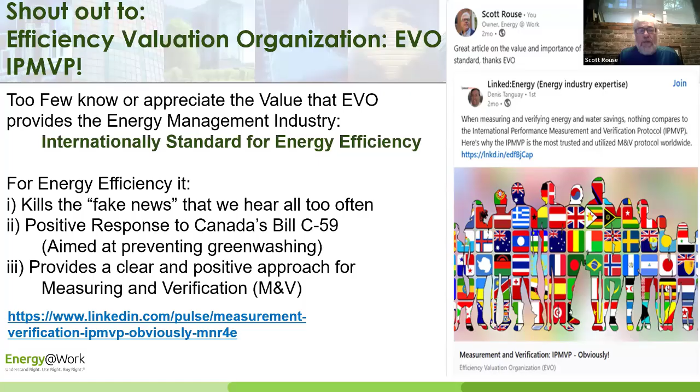So I'm going to go through the welcome objectives and some introductions very quickly. Our learning objectives - we've always wanted to bring content to these webinars.

We don't want talking heads. We want heads who talk and be able to share real value in what we've done.

I'm going to lead off with a case study that we've done with 28 commercial offices. This was for a 4-year project. Then we're going to have Stephen talking about RETScreen and really releasing a good portion of its capabilities. And then Amir is going to jump in with some specific projects.

We don't want to talk about generalities. We want to be very specific. And then we'll end up with a call to action, what you can do, and hopefully give you enough confidence and information that you can take away and actually take advantage of what is available.

So let me start out with KnowEnergy. KnowEnergy has been around for 4 decades, doing education, webinars, workshops. More importantly, analytics. If you've got a challenge, Stephen is first up to help work through that challenge, understand the data. He's famous for saying, let the data speak to you. And I've taken that to heart, because a lot of times people will throw numbers at you without actually stepping back and listening and trying to understand what that data is really telling.

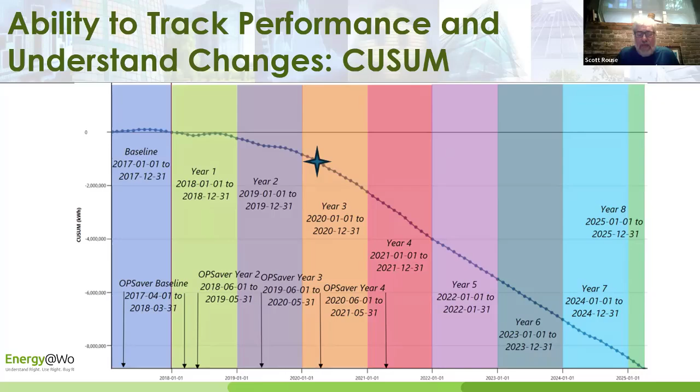What was exciting about this and the other projects is the sustainability of energy efficiency. A lot of people think it goes away, but with that energy management plan and direction, we've been able to demonstrate that we've sustained the savings. Again, we've used RETScreen to help make that possible.

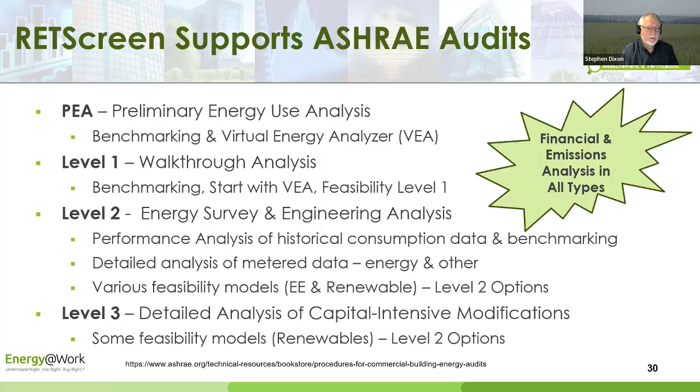So, pre-feasibility. Here's where we can start with the virtual energy analyzer. We can scale the building to our actual building, and I'll give you a view of the analyzer and the scaling tool in a minute. We can do benchmarking. We can set base case, proposed case, and set targets for reduction and what that would save.

We can select within the archetypes, which are in the virtual energy analyzer, and select or deselect certain projects to include. So you're given a sort of archetypical building, but you can tailor it to your own situation to some extent. What that allows you to do is arrive at a pre-feasibility assessment of what opportunities might exist. You can do a financial analysis and emission analysis here.

So the archetypes are really full-blown models in RETScreen. The word archetype really means a very typical thing. The archetype has benchmarking information in it, but it also has detailed information about the building. It can be by measure, or by whole facility, for many different facility types. I can't remember how many facility types exist in the archetypes, but it's in the hundreds for sure.

And each one has a description of the base case and the proposed case—so what is this archetype designed to represent?

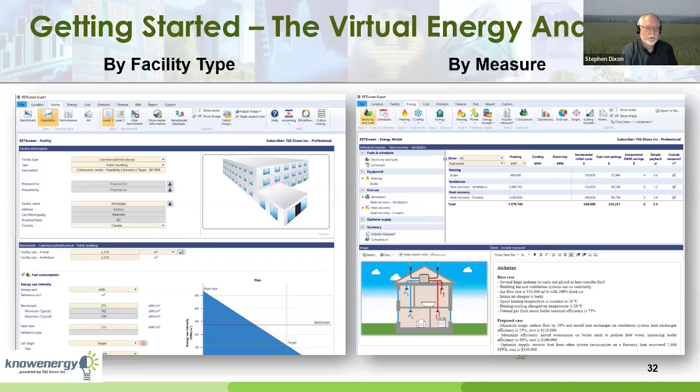Now, the scaling function—this is where you can take a predefined building, maybe like the one on the left here, and scale it to your own building. So maybe the archetype was 4,500 square meters, your building is 6,800, you can scale that. You can also scale the costs for the measures and the fuel consumption, and they aren't necessarily linear scaling. In this case, it shows a linear scaling because we haven't entered a scaling exponent, but it could be nonlinear, and we can add that in.

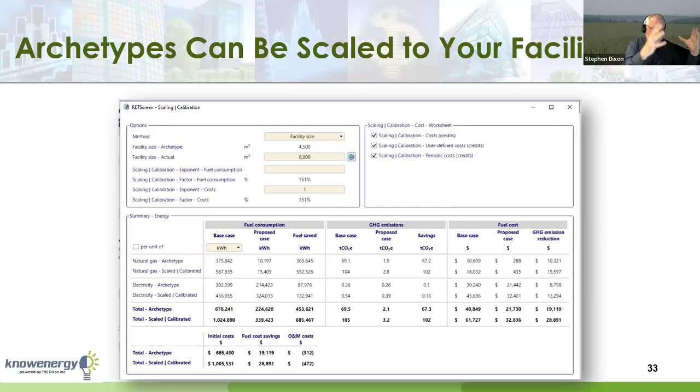So you've got flexibility to actually scale the costs, the consumptions, and the emissions as well. At that point, you get essentially a user-defined building. Once you've scaled it, you can save that as a user-defined building, make it static, or go back and tweak it a bit more, changing some of the measures in the building.

So the measures in the building are typically listed on what we call the include or exclude screen. Here's the building completely decomposed into all its different bits and pieces, and we can select or deselect measures depending on whether they fit our building or not. Here's an archetype for a community center, and here's one for a curling club.

There are two types of archetypes in RETScreen: low carbon archetypes, typically 80-90% carbon reduction. Those are smart archetypes because, when you open them up, depending on where you are and what the weather is, they do a lot more logic to determine what the building should look like in the proposed case—how do you electrify the building, how do you apply renewables, and that type of thing.

Whereas the energy reduction archetypes are simply a kind of model of a building—not as smart as the low carbon archetypes—and they typically target a 40% reduction in energy. So if you've got the downloaded free version, have a look, you can go and examine these things.

There's a view of the screen which shows you the emission reductions. In this particular case, it's an 89.9% emission reduction, and it's very sensitive to where you are in the world and the fuels you're using. Factors exist for the world over, so have a look—your country in many cases is represented, so you don't have to dig those factors out yourself. Those are in there and are constantly upgraded or updated by RETScreen.

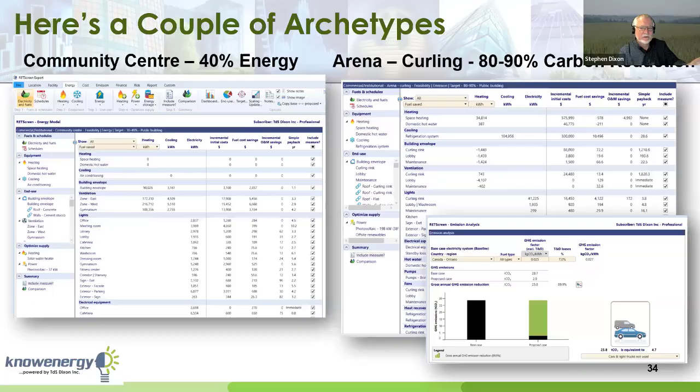We use it to begin with to say, hey, look, there's opportunity here, but now we're going to make it look more like our building. Or we can start from scratch and build our own building. What I often suggest people do is use the archetype to guide them in building if they've not done this many times before.

Eventually you'll build your own building. Over time, you'll develop the ability to enter a building relatively quickly. There are some tricks. This is not a simulation like eQuest, CanQuest, Trace, or any of those things. It takes a different approach. It's an energy accounting model. It accounts for where all the energy is going, which is a little different from a simulation.

We've had lots of courses online too that talk about how to apply RETScreen. But if you've used other tools, just be aware that when you start using this one, you've got to think a little differently about how you're using your modeling tools.

You can determine the savings, you can add the costs. This is a view of the cost database in RETScreen. In many cases, you don't have to go out and get quotes and estimates from suppliers or contractors. You could use the database to do a first pass on the project cost, and then once it looks good, you tweak those numbers.

So the nice thing about how we do feasibility in RETScreen is you can do a basic approach, kind of a placeholder in your analysis, and then upgrade it. When things start to look good, you can add more detail or less detail in a particular area. RETScreen is pretty flexible with that. You can usually get launched pretty quickly on a building with a few basic pieces to the structure and then build out the detail as time goes on.

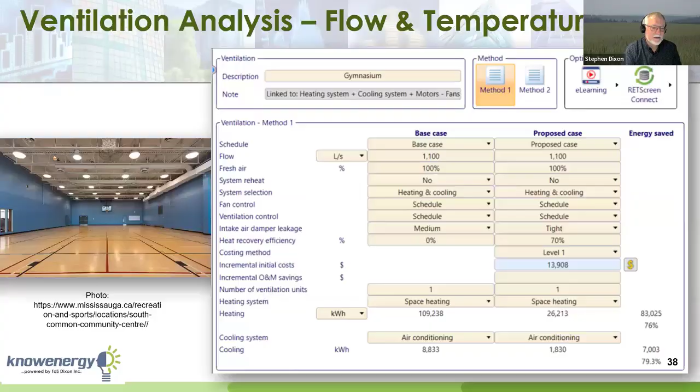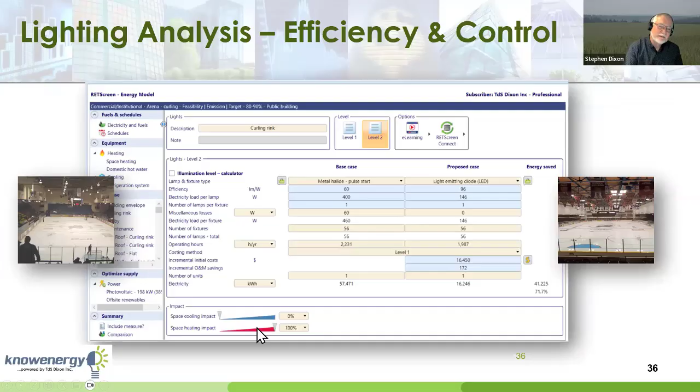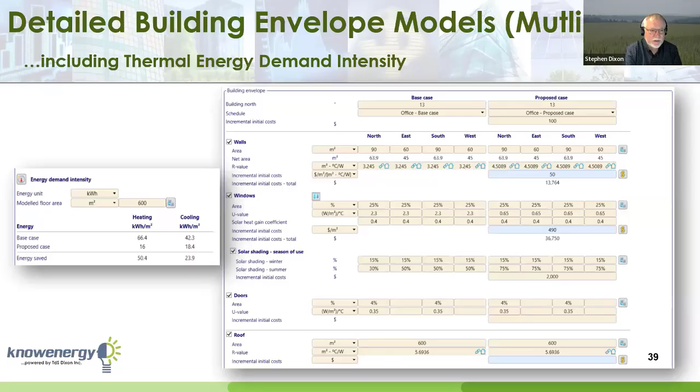So when you're finished your feasibility analysis, you can basically lay everything out. This is your refined building. You get some nice graphs to include in your report, and you can see the simple payback of each of your measures on this screen.

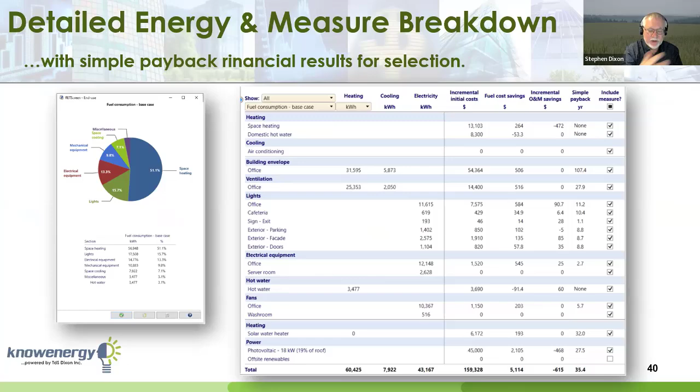Now, what if RETScreen can't do the technical analysis for your project? How can you use this risk and sensitivity tool? Well, you can go in and define a user-defined project. Remember, user-defined project in RETScreen - you can put your parameters into the user-defined screen, how much energy, what the cost is, and everything else that RETScreen would normally calculate, but it can't in this case. You put the user-defined project in, then you can run the risk and sensitivity tool set on your user-defined project. So even if you don't use RETScreen for the technical calculations, you can use it to do the financial calculations. Very powerful in that sense, but it does work together seamlessly as a tool.

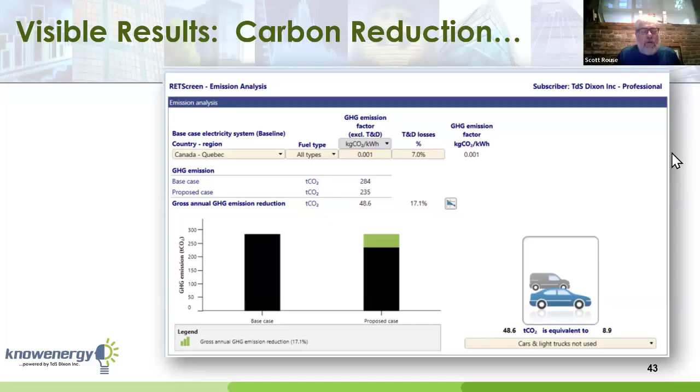Yeah, Stephen, if I could jump in with a comment on that - I've found that so often that maintaining the momentum on a project requires that you get the right information to the right person at the right time. I think your point on the visibility helps make that so much more realistic and tangible for the different viewpoints that you have to bring into the team. So it's a great point. And again, making it visual and real for people, that's the people process products that comes through over and over again. So thanks for that.

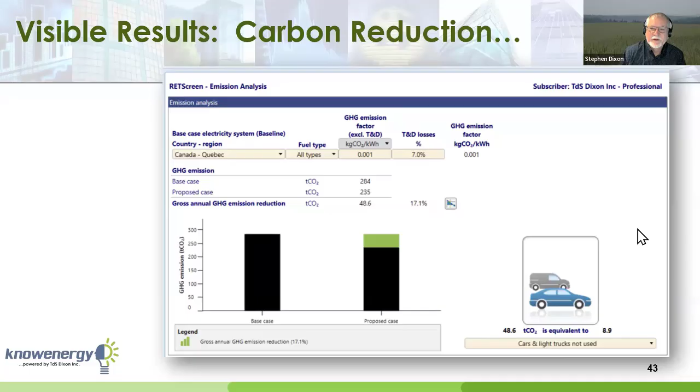Now, one thing that's not in RETScreen, I'd like to see there - maybe one day it'll be there - I like to use the one-page proposal. If you've never seen a one-page proposal, just Google it. There's a book around it. I didn't write the book, but it's a neat way to present all in one place, on one page, a very simple, succinct argument for doing a project.

Stephen, if I could jump in there. We just completed a project. It was a lighting project, quite complicated for a large commercial office. The response I got back from our technical study, we had all the graphs and numbers and backup. And the response I got back was, Scott, can you just make this a one-page? We're getting questions from the asset team in New York City that wants to understand all the numbers, but they have to make it very clear and straightforward to them.

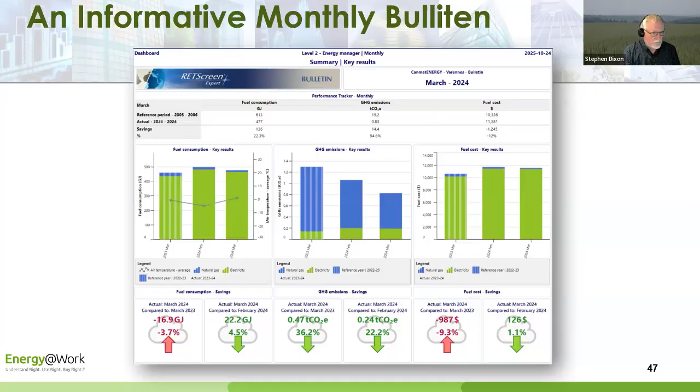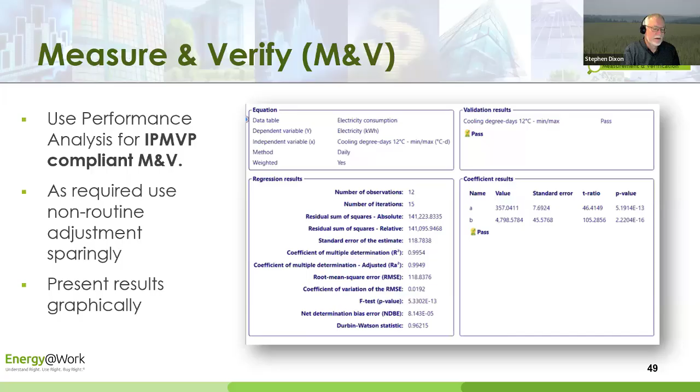I'm not going to go into more details, Amir will take care of that. For those that are IPMVP folks or M&V folks, RETScreen has the tools to make sure you do the statistical part right. That's all I'm going to say here. There's the detailed statistical screen. There are also things called non-routine adjustments. Need to be used sparingly and properly, but there is a guideline for non-routine events and non-routine adjustments. RETScreen covers or supports a lot of the methods in the EVO specification for non-routine adjustments. So great little tool from that point of view.

What's behind what Amir is going to talk about in a few minutes is he's going to start with energy and driver data. He's going to assemble it into a linear regression or maybe a nonlinear one with multiple variables, maybe not just one variable. I've just got a one variable regression pictured here. And then from there, we're going to create a CUSUM chart. The CUSUM chart is the cumulative sum of the difference between what the regression predicts for the baseline and what actually occurred.

Then depending on whether it goes up, which is more, stays horizontal, which is holding the line, or goes down, which is less, we can construct the so-called M&V chart within the whole M&V protocol, which shows us the savings in green.

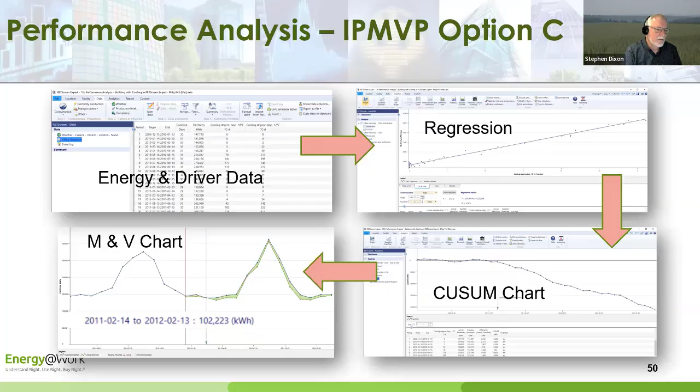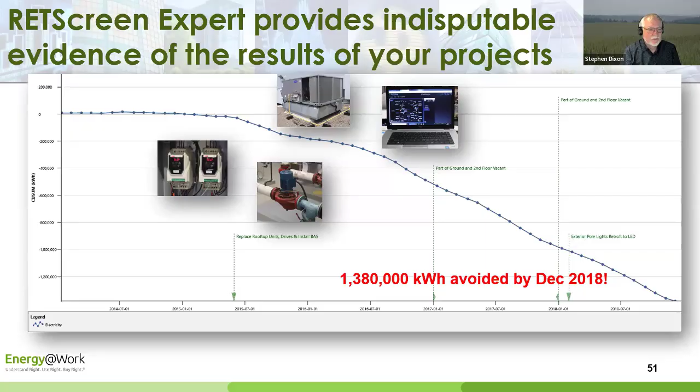I'm going to let Amir dig into that more. Yeah, somebody once said that the CUSUM chart, which RETScreen supports wonderfully, is indisputable evidence of the results of projects. When a financial person who doesn't know technical things makes that kind of statement and then gives you another $300,000 — real story here — that's a reason to use such a tool.

And you can use it on electricity, natural gas, or anything you can track in RETScreen. So up is more, down is less, flat is holding the line — your trajectory of consumption and performance.

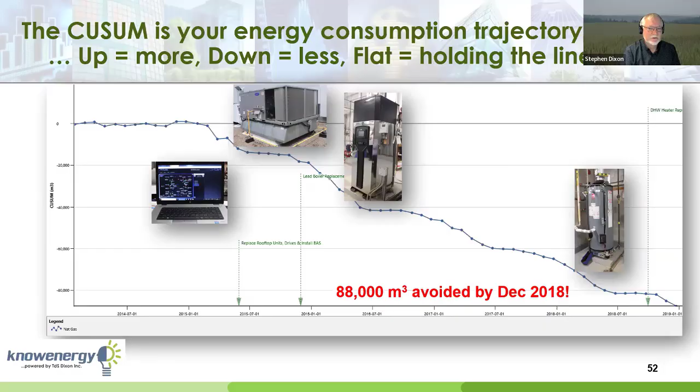You can do your reporting for M&V, measurement and verification, using a custom dashboard or a bulletin, as you wish. I think I'm out of time, so I'm not going to do the demo here today, but I'd be happy if people wanted to. I always put out the offer — if people want to send me an email, I'd be happy to answer their questions and show them how to do particular things.

So the last thing I'm going to finish with is, why use RETScreen from my point of view? It simplifies your life. It really does — once you start to use the tool, I know people will say it's a complex tool, but it can simplify your life, though it can't teach you how to spell. That should be re-roofing — that's my bad.

Standardization, right? The databases in it allow you to standardize things. I have clients that request other providers to give them their projects analyzed in RETScreen to standardize the approach so they can compare one to the other.

Persuasion — the graphics, as you said Scott, are absolutely important, whether for technical or financial things. And ultimately, what I mentioned before, the interoperability of the tool, being able to connect to other things.

You can connect to real-time metered data, you can connect to ESPM, or the list of things you can connect to with RETScreen grows every day. My house is monitored by a little residential monitor called Eyedro Energy Monitor. I can pull data from the service entrance to my house, which comes in on a second-by-second basis, and I can do my analysis in RETScreen.

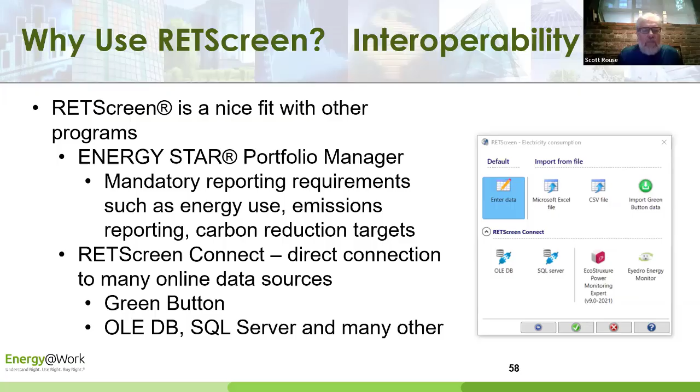So Carlos asks, can RETScreen connect to APIs for independent variables? Yes, it can — there are SQL databases, there are a number of different APIs you can connect to. If you've got data in a SQL database somewhere, you could probably connect to it. And even if it's not within the standard connection set, if you reach out to RETScreen, they'll often help you create a custom connector for your purposes. They're keen on building those connections and they work very well. We've used them quite a bit.

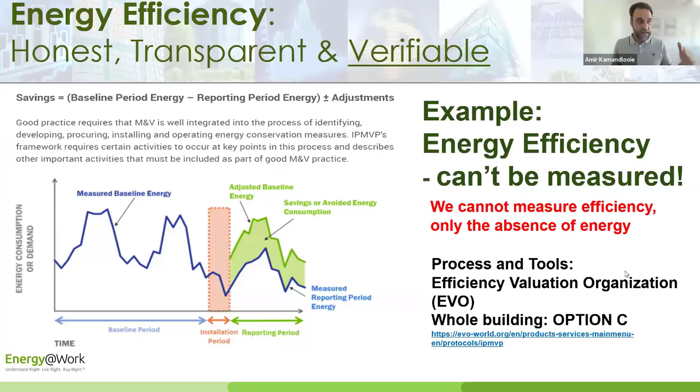Thanks to EVO, the Efficiency Valuation Organization, we have that principle in our M&V community. We can stick to these principles and make sure that what we are doing under M&V to quantify these savings is internationally accepted and based on the 6 principles that EVO published in their guideline.

If we do so, then whatever we do to quantify savings on a specific project for a building, plant, or factory can be verified by another professional somewhere else in the world, and that can be acceptable. In a nutshell, M&V is about how we do things, and IPMVP is about how we think and sets the quality and standard.

Now that I've touched on the M&V plan, I'd like to get into where RETScreen M&V sits. On one hand, we have the IPMVP protocol that we have to adhere to, and it sets the quality standard. On the other hand, we have to do an M&V plan explaining how we are going to quantify the savings.

We believe that the RETScreen M&V feature is a practical link connecting these two, providing an analytical model to establish a baseline and start quantifying, reporting, and verifying the savings in a systematic way. So I think this completes the whole basket of tools by having M&V with RETScreen.

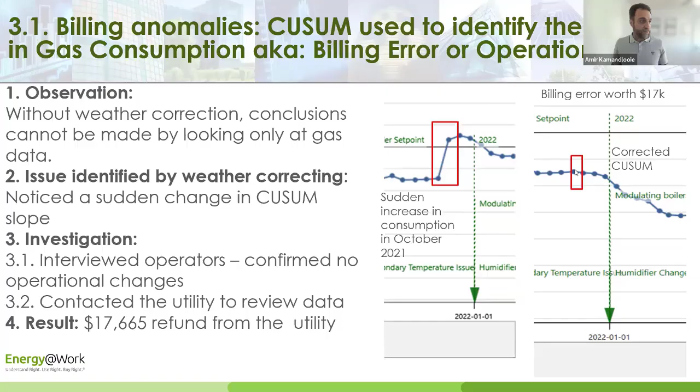Here we have a more complex situation. We had a baseline with the commercial building based on 2017 data, and we started making changes in the building, getting gas savings every year. As Stephen mentioned, whenever we have a line going downward, it means we're saving. In 2021 we had good savings, then winter of 2022 came along and instead of seeing the savings sustained, we had an increase in natural gas consumption.

When I started talking with the operations team, the first item that came up was that they run their humidifier to respond to tenant requests for higher relative humidity in winter. We were not satisfied with that result, so we started digging deeper - if the humidifier is working, we can expect a certain amount of gas use increase, but that didn't align with what we saw on our CUSUM. When we dug deeper, we found there was a passing valve that also came at the same time, increasing our natural gas consumption.

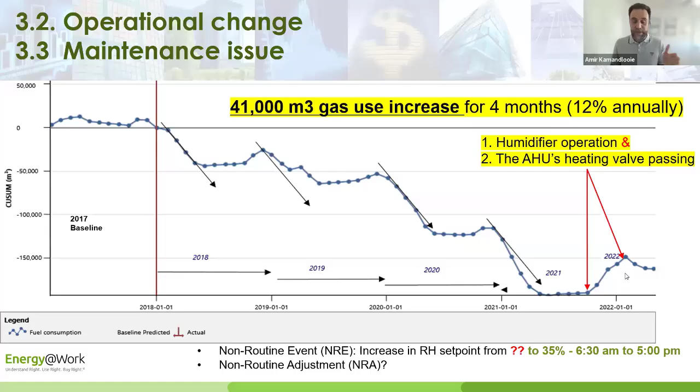That was very good - having CUSUM on a monthly basis to monitor building performance and report back that there was something going on. Once they understood the situation and the problem, they started budgeting it and made the fix the following summer. The next winter, even though they still provided a high level of relative humidity, the savings could be realized.

Even though the slope of the line, which is very important in our analysis, is slightly degraded in 2023 versus 2021 - an indication of using the humidifier - without M&V everyone would probably stay under the impression that using the humidifier was fine. It is not okay. Again, everything started with RETScreen, M&V, and CUSUM analysis. So they addressed the issue, resulting in 90,000 cubic meters of gas savings, equivalent to $30,000.

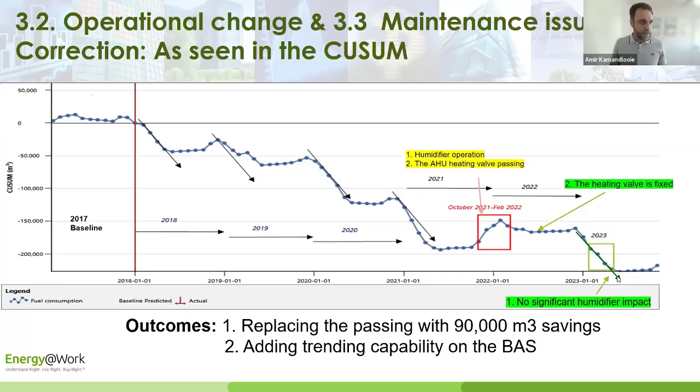This is another example where we started our service called EMAP, where we establish M&V and meet with the operation team on a monthly basis. We started in 2022, but to look at historical consumption, we established a baseline, typically from 2019 for commercial buildings, to see how they responded to the pandemic in 2020 and how they've been performing. We realized that just before we started, there was a significant change in the slope of the line, indicating higher savings.

When we started talking with operations, they said they began looking at the schedule and trimmed it back to make it more aligned with the tenants' hours of operation. And this is what we did.

Credit to the operation team, the effort they made can go unnoticed because no one can really see what they achieved. But thanks to having M&V, what they did in the past is now quantified. In this case, they achieved $79,000 in savings thanks to their initiative.

This conversation, where operations' effort sometimes goes unnoticed, was reported to higher level management, and now there's better awareness of how impactful operation teams are in making changes in the building. And again, everything started with having CUSUM and looking at it.

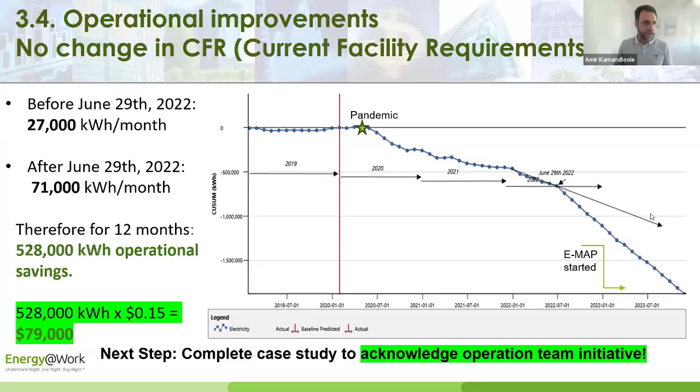Moving on, we were trying to cover different things with our M&V feature in RETScreen. In this particular case, we have two different things that our CUSUM is helping us identify and later quantify the changes happening in the building. We were working with a building that was very proactive in responding to different projects and taking initiatives to implement changes.

Some things like EV chargers sometimes cause an increase. If we know the EV chargers are sub-metered, we can start subtracting that consumption. This is where non-routine events and non-routine adjustment come in.

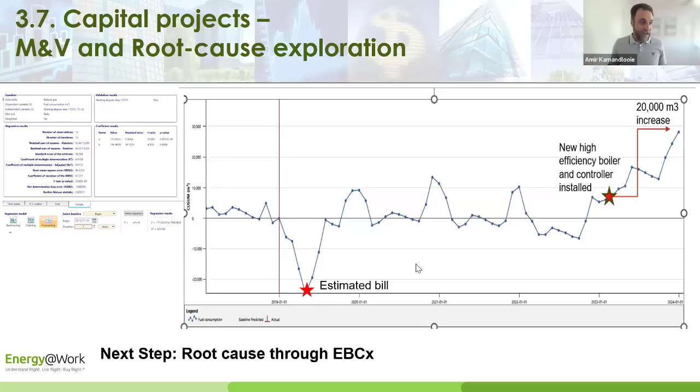That's why I tell people to run their CUSUMs monthly, or even weekly. Just every month look at it, and if it turns upwards, even though there's lots of noise in your baseline, you know when it's turned upwards. The CUSUM has this neat ability to detect changes that are not noise.

Exactly. And that has to be communicated with people to know, okay, what direction we are going and what is the root cause for these changes.

Sorry, if I can just jump in again, because I think it's a really good point when we're talking with operations and talking to people. People don't remember what happened three months ago. Basically, they don't remember what happened a month ago. So having that regular communication and getting them comfortable with looking at the data is, again, a way that we can sustain interest.

And I always talk about what we're doing is not a destination. Stephen's been in business doing this for 40 years. It's a long journey. It's a journey that's meaningful and worthwhile when we see results.

Having said that, Scott, about people not remembering things, there is an event log in RETScreen. In addition to all the numbers you can record for data, you can record a diary, you can import it from an Excel or a Word file, creating events over time. Those can be overlaid on your graphs automatically. So there is a way to prompt that memory of that journey. Sorry, no, it's good. Okay, sorry to interrupt, Amir. You're doing great. Thank you, Scott and Stephen.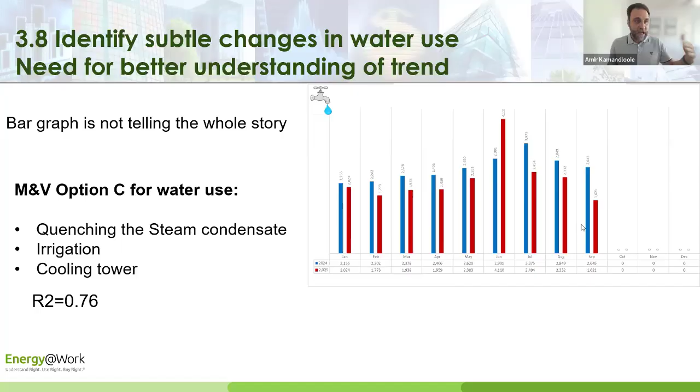That's the only thing we can understand from the bar graph. But when we dig deeper and establish a baseline based on 2024, then we see what kind of changes are taking place. And that prompts the conversation to talk with the operation team: what is happening in your site?

If you are doing something and quantifying it, that can pave the way for future investment, because people and decision makers can see the result from it. So these are all pieces together.

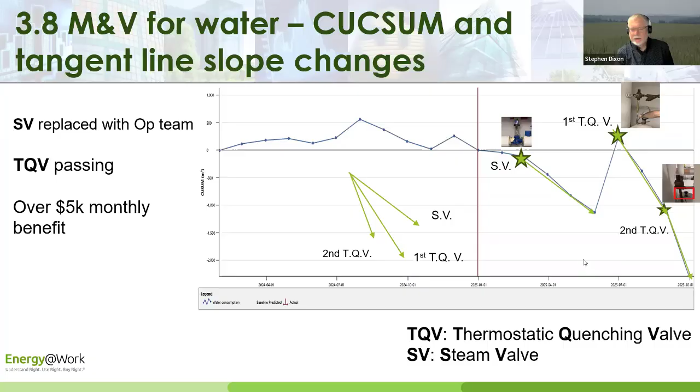I think, Scott, we want to understand what else they want to learn, right? Yeah, I think that would be good, a great opportunity, especially with such an international presence.